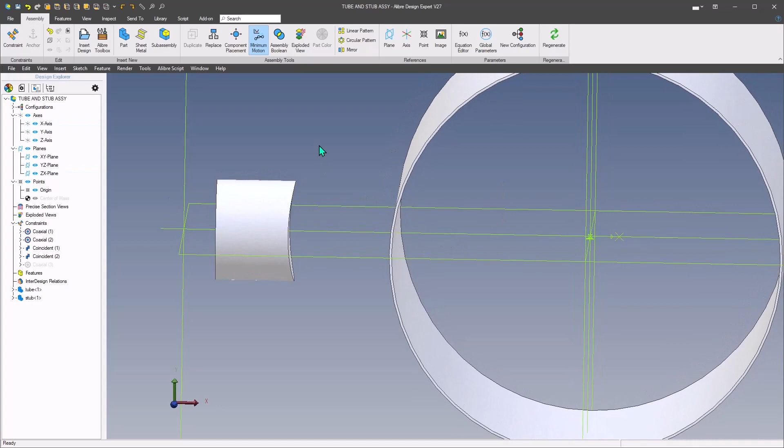The question came up on the forum about how do you create a pattern of holes to attach a small part with curvature to mate to the curvature of a longer part, with a circular pattern of screws to attach these. If you have a hole on plane, that's not a problem since it's straight through, but as you pattern it around the curvature face, figuring out the angle becomes a challenge. So how do you go about doing that?

I'm going to show a technique here using Pro or Expert, and then I'll follow up with how to do it in Atom3D.

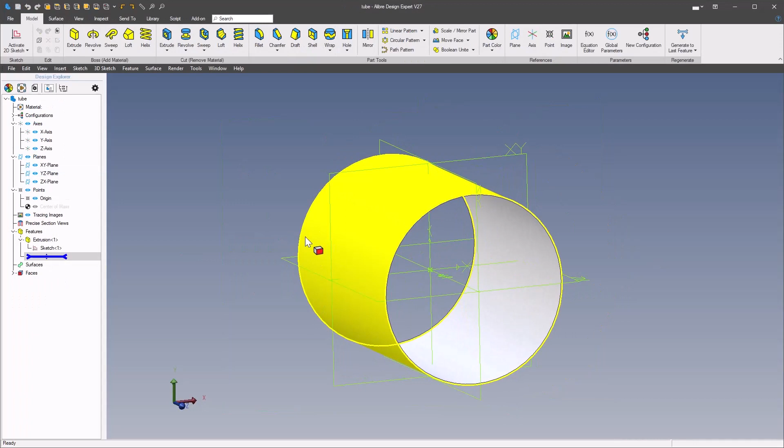First I'm going to open up this tube part, which has a diameter of 10 inches, and open it in a separate window. First thing I'll do is create a plane tangent to that face, then close that and create a sketch.

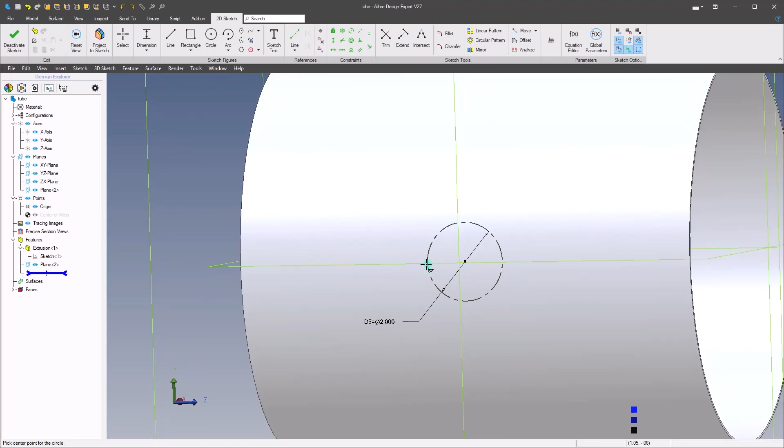We'll have a sketch right on our origin for simplicity, make this 2 inches, and put some smaller circles on here for the hole pattern. The first one will be horizontal to the origin, and we'll make them 1/8 of an inch to keep the numbers easy to remember.

Then we'll add some reference lines in here and dimension these at 120. This one will also be 120, and we'll set it to A1 to equal everything out. Now we have our hole pattern here.

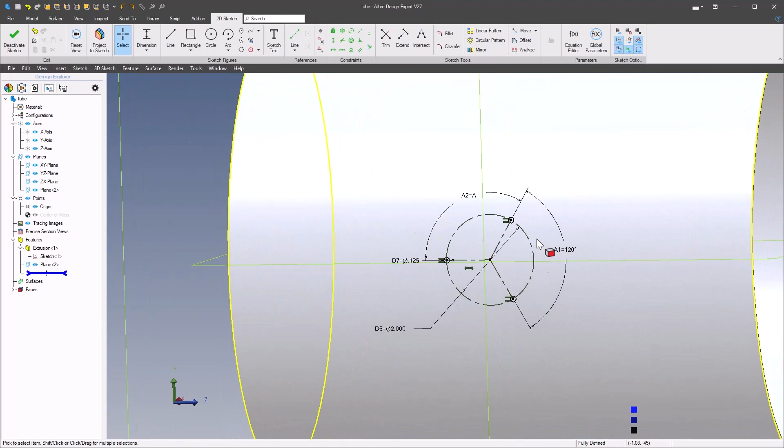Now, if you have Pro or Expert, go to the Model tab and select the Wrap tool. Select this surface, change it to Deboss, and make sure the value is set so it goes through the material. There's your hole pattern.

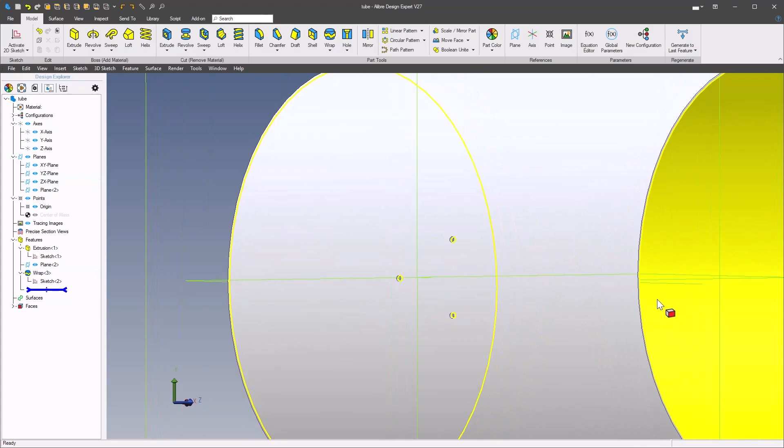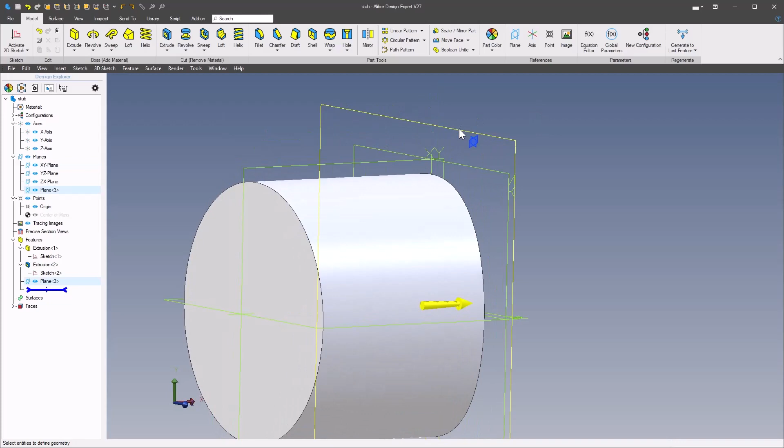Now if we go back to our assembly, we can open the stub in a separate window, and again we'll repeat this. Same steps: we'll insert a plane tangent to that curved surface, and then on this plane we'll start a sketch.

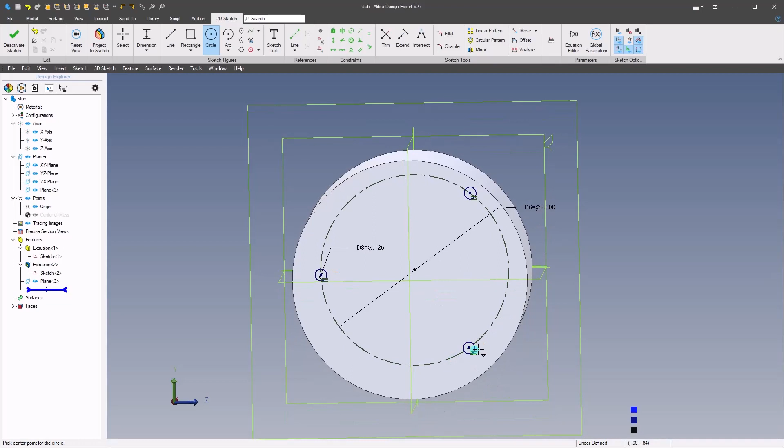Same as before, we'll have 0.125, and make these all equal, and put in some sketch lines here and dimension these. The first one we'll make horizontal, then this will be 120, and this one here will be A1 to make it equal to 120.

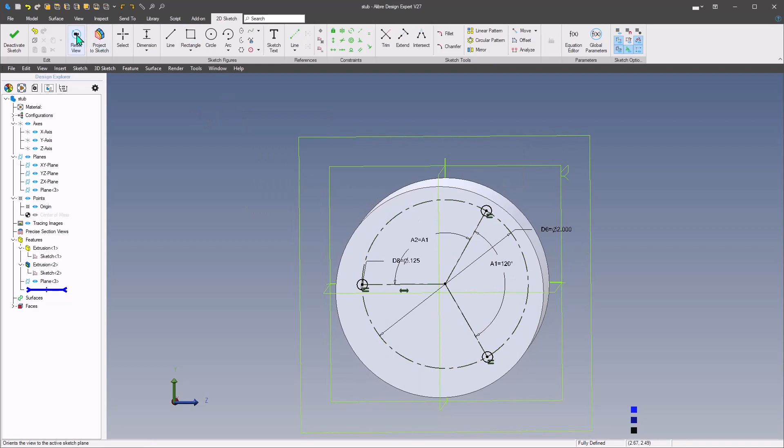Again we'll go up into the Model tab, grab our Wrap tool, select our face, and here we'll just set this to be deep enough for our screw, select OK, and there's our holes.

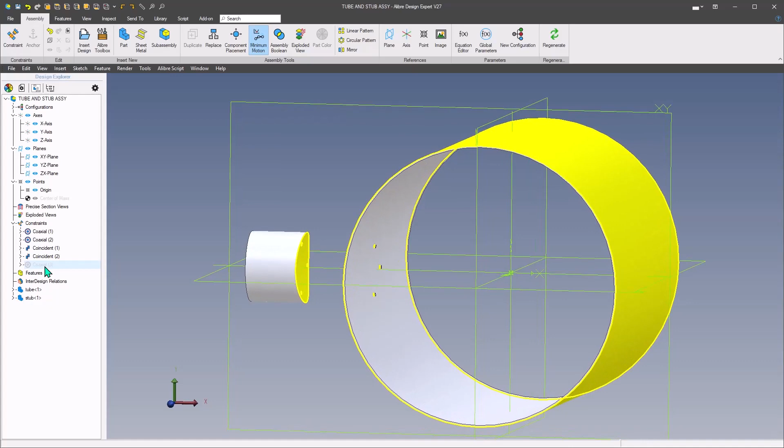Now we go back into the assembly, reconstrain the tube, and unsuppress our mate for that. Let's take a look in our inspection tab, and look at that—we have our holes lined up perfectly for screws to be inserted as our final assembly.

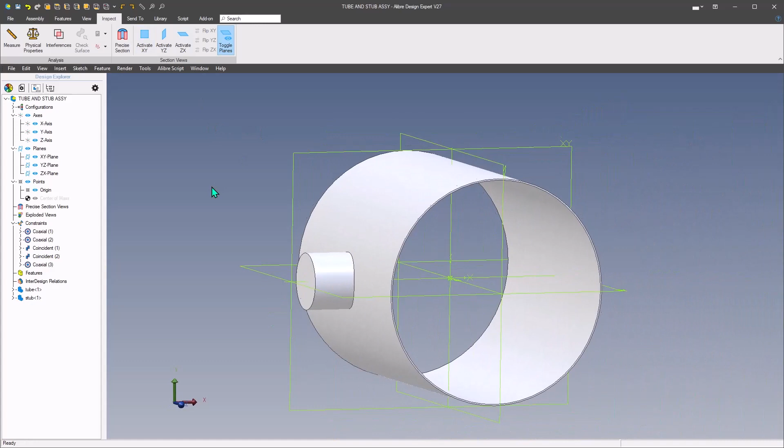So now the question is, how do you do this in Atom without the Wrap tool? Let's go back into our tube assembly, and we'll just delete Wrap.

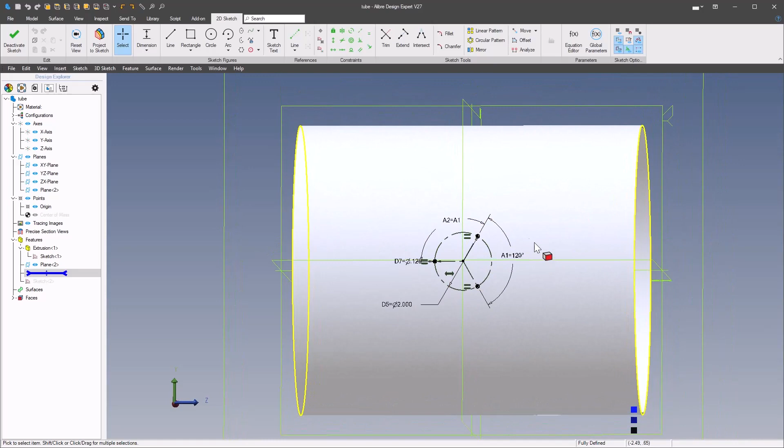We'll come into our sketch, and we need to create some reference geometry on here, because we're going to have to make some extra reference planes to work on. So first we'll insert some points from the sketch. At the center point of each one of these small circles, we'll select that and click Apply, then put a point at each one of those locations.

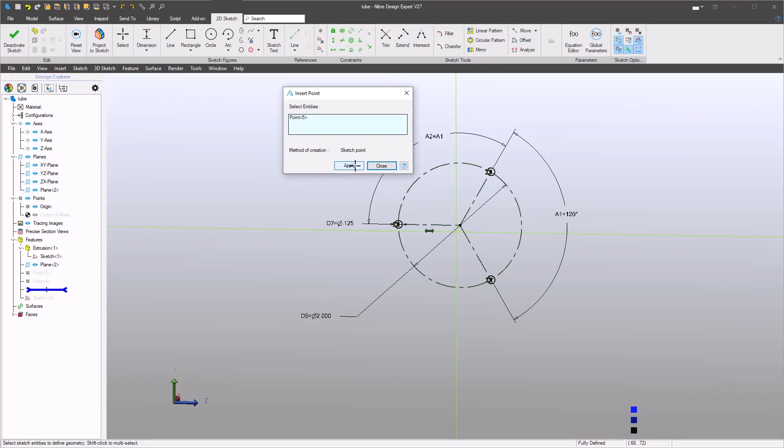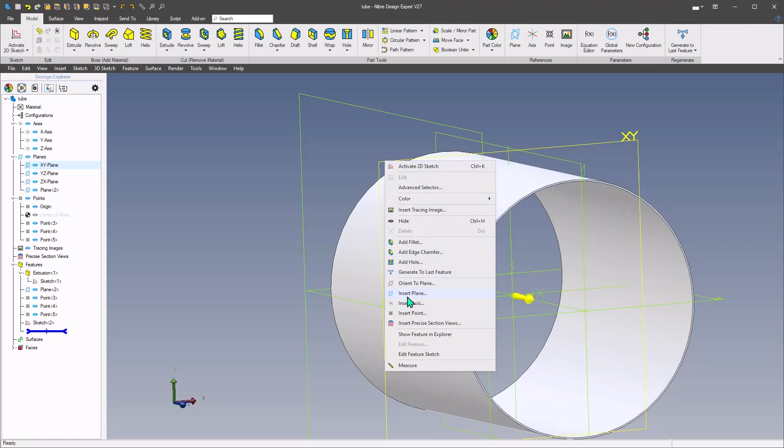So now, looking at the front, these two are off the surface of this part. The first one that's horizontal to the origin is on that surface. So what we need to do is create some planes we can sketch on. We'll go to Insert Plane, grab one of these points here and apply, and then grab this back one here—oops, not that one.

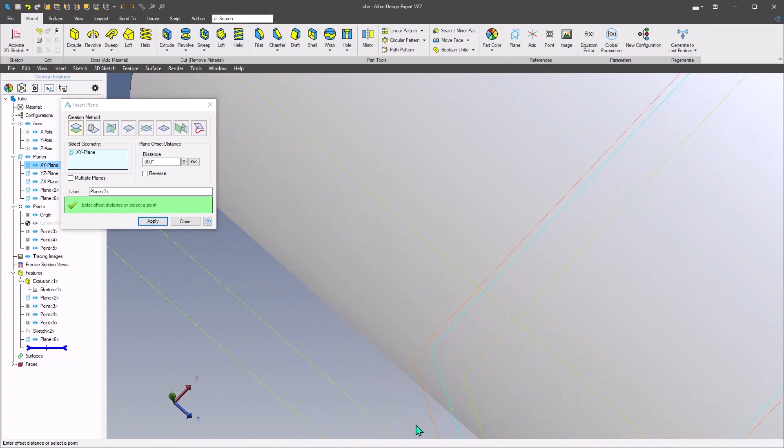Clear all. We want to grab the point. There we go. And we'll close that. Okay, now on this front plane, we'll activate a sketch.

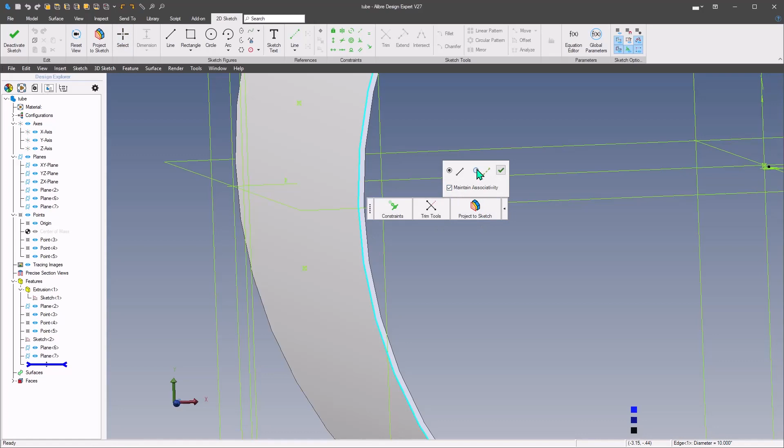And the first thing we're going to do is we're going to grab this first top outside edge, and we're going to project that, maintain associativity, and create a reference figure on there. And then we're going to grab and create an arc. Well, let's see, let's create our arc from the center between these 2 points.

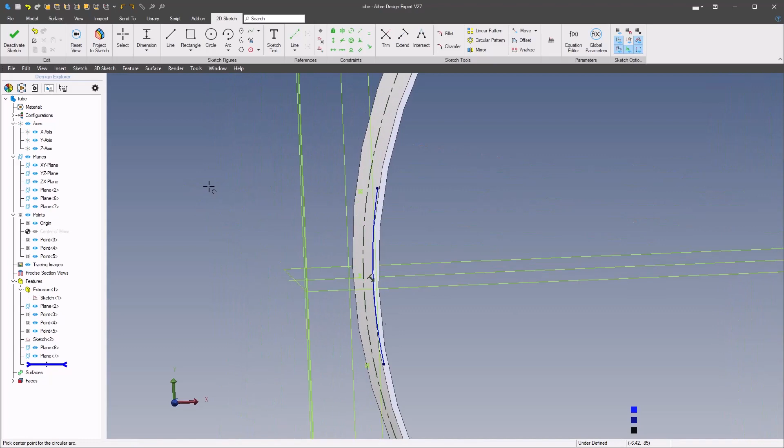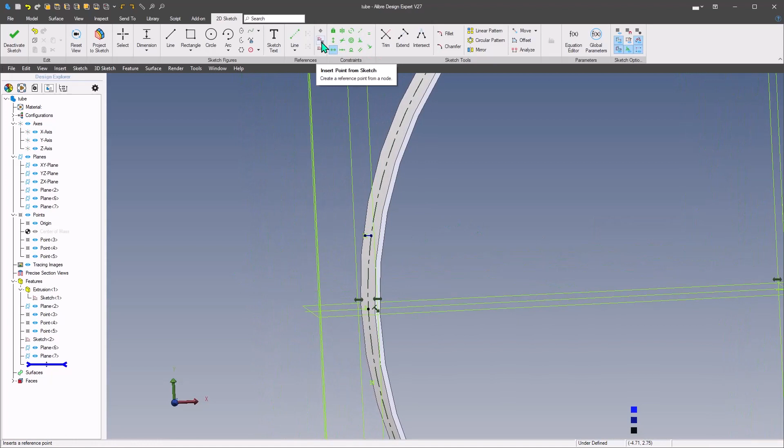Oh, back up. I want to create an arc from this point, because we want to wrap this point over onto this surface. So we're going to have a center of our arc is here, and then we'll constrain that. It already exists, and it already exists. So now let's make sure that this center point is horizontal there, and now we can do a point from sketch to this point and apply that.

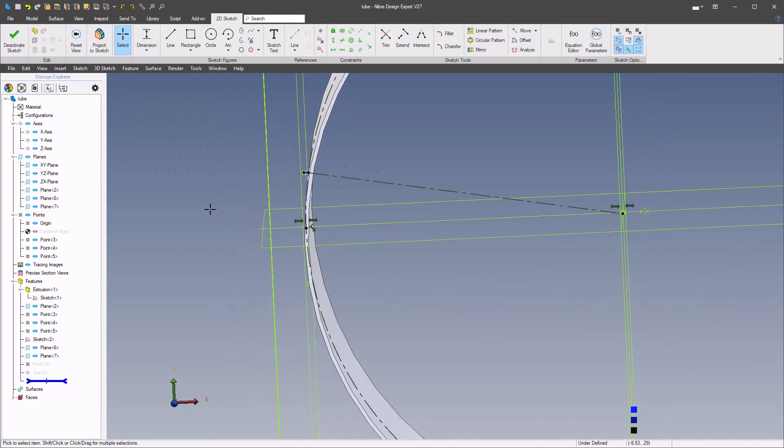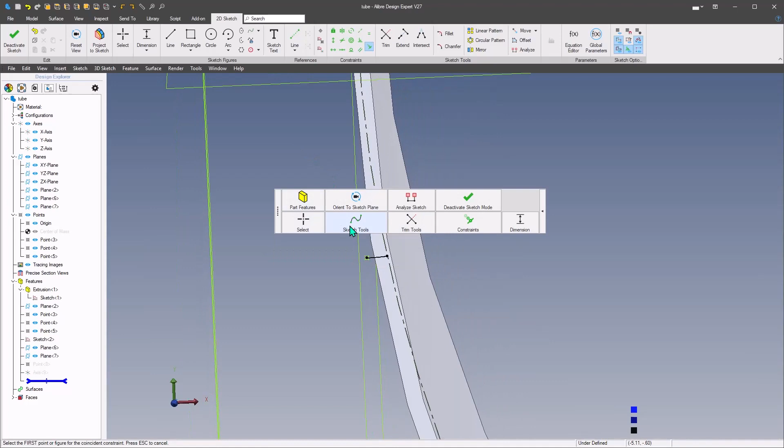And while we're here, we'll throw in a sketch line from that point to the origin, and we'll put an axis on this line. And then again, we'll have the same scenario. We'll draw another arc. This can be the center point. And a couple of constraints there on the endpoints of this arc. One to this point, and then to this line, and reference line from the endpoint there to the origin, and then a reference point on this point, and an axis on this line.

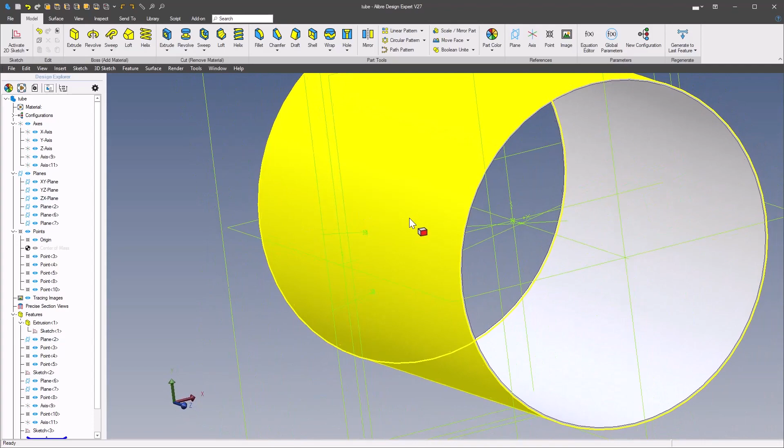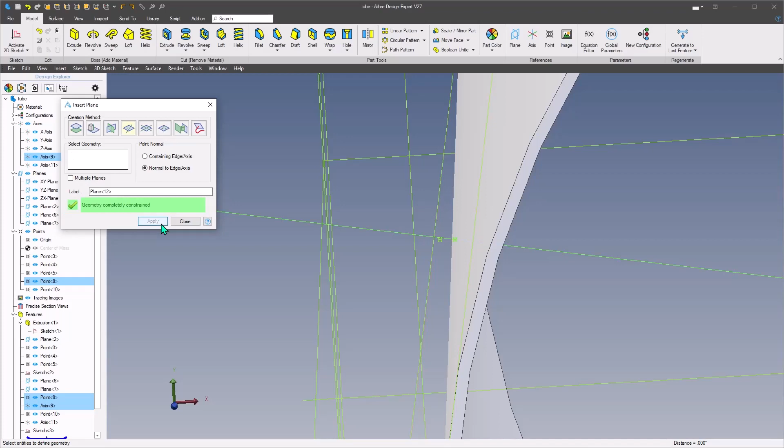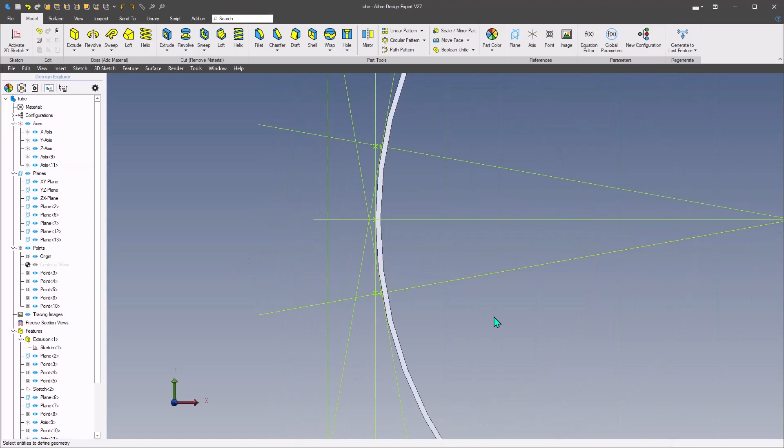Okay, now in order for us to create this circle to punch through these holes, we need a couple more reference planes. So we'll go in here and we'll do an insert plane. We'll grab this first axis, and then we're going to grab the inside point, and we'll select normal to and click apply. And then on this bottom one, we'll select the arc and grab this inside and apply there and close. So now we've got our 2 planes that are on these points tangent to the outside surface.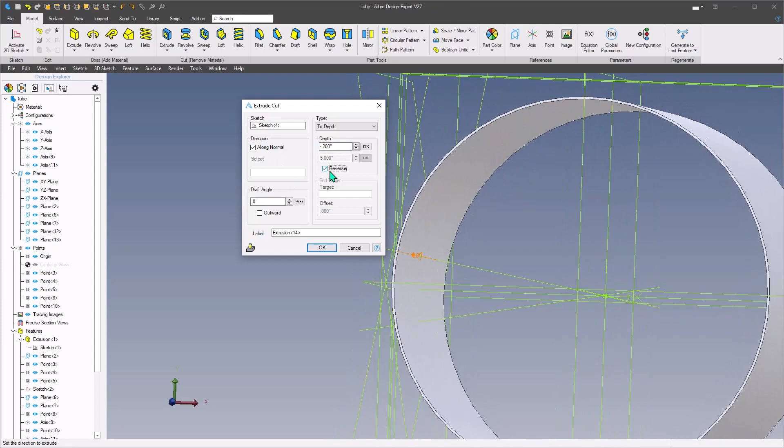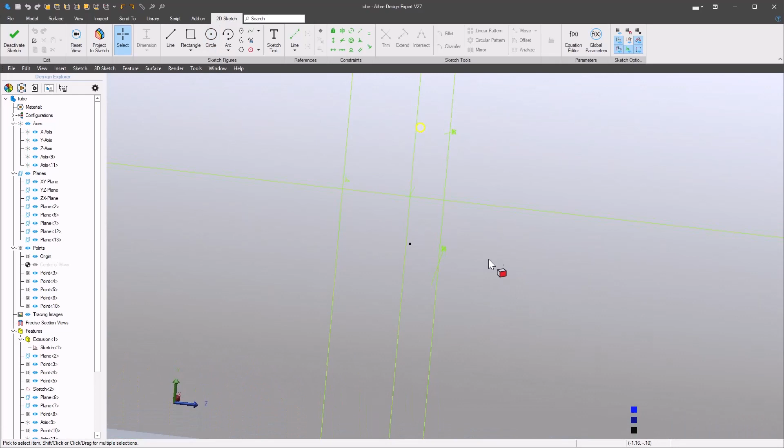So when we create our holes on those points, we'll grab this one here, we'll activate, and we'll draw our first hole. 0.125, and we'll punch that through. Make sure we're going through the material. And then on this plane, we'll do the same thing. We could have mirrored that top hole, but for sake of... oh, I see, I gotta mess that one up already. So let me

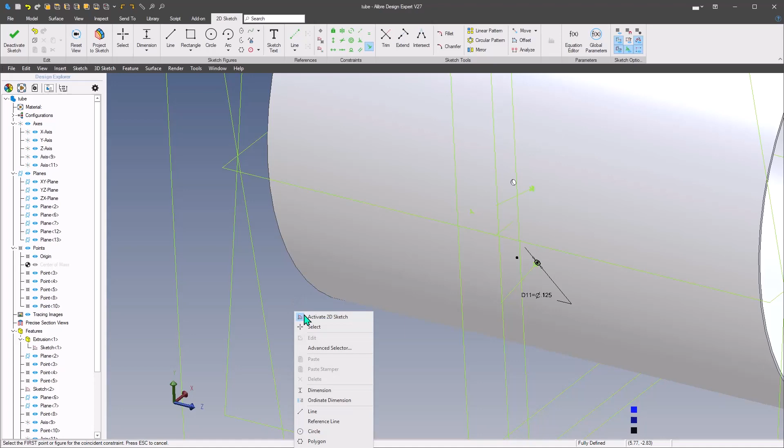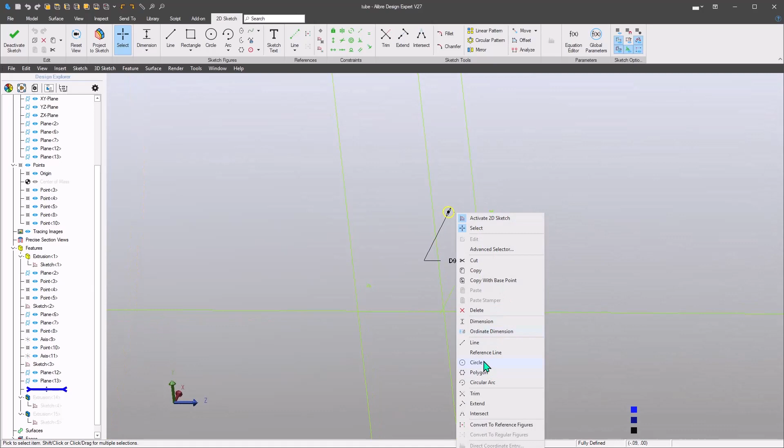0.125, coincident to there. Make sure you select the right, and that'll make sure it's going the right direction. Yep. Okay, let me go back up here. Yeah, see, I did this on the origin. I should have done that on the other, on that other point. 0.125 and coincident from the center to this point. There we go.

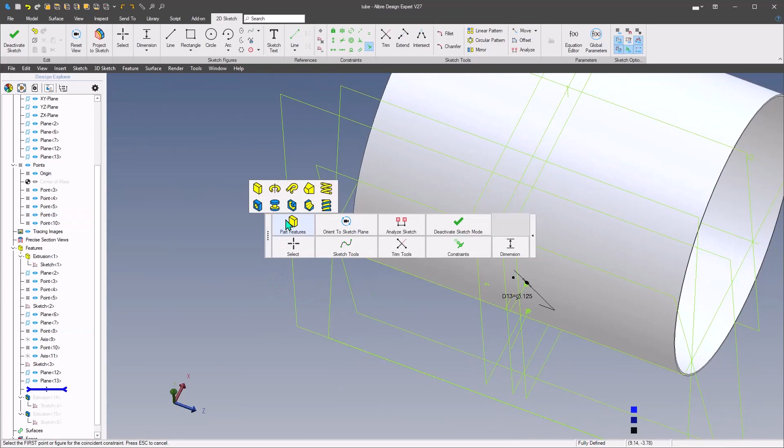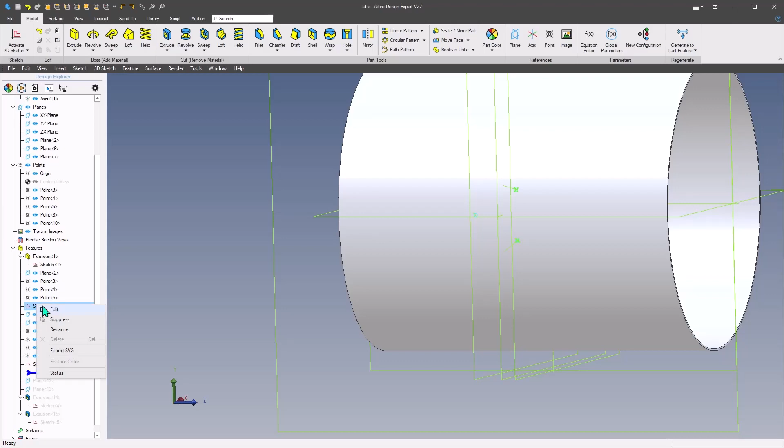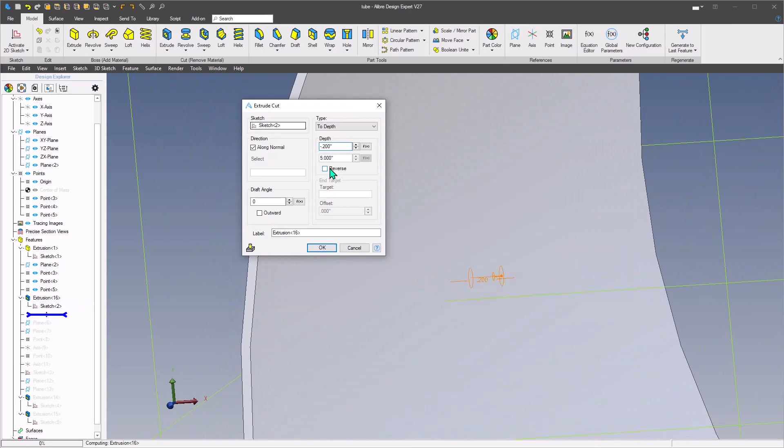Now, those two planes, we can turn them off to get rid of some of the clutter. And if we go back to our original sketch, not that one, it's this one, yep. This hole, this arc, we'll change this to reference, and this one will change to reference, and then we'll punch that through and rebuild. Okay, so now we have these holes with axis points through.

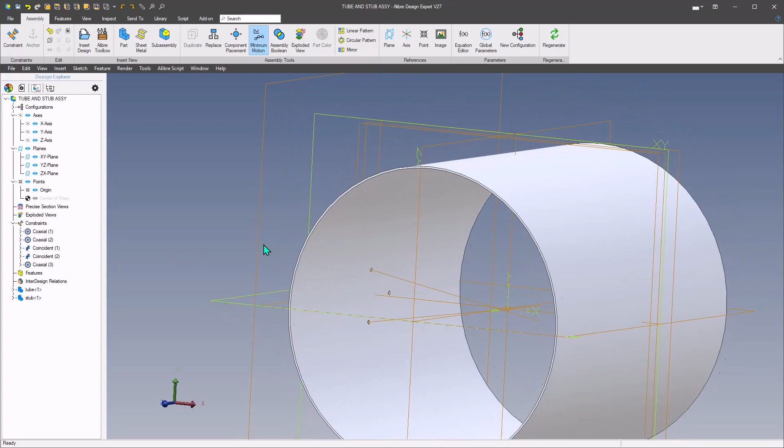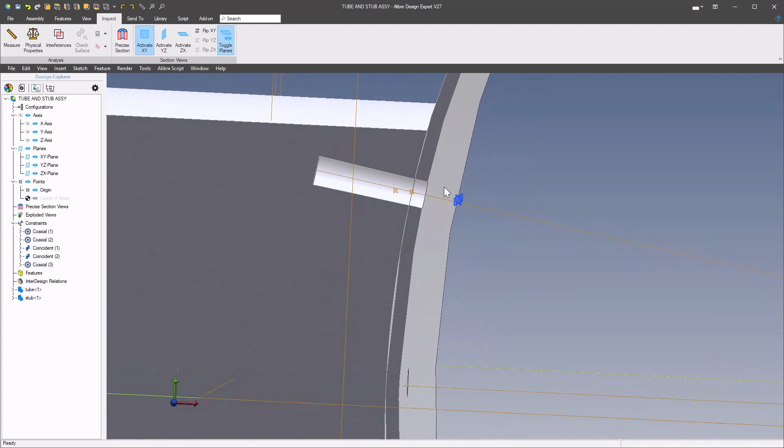So back in our assembly, turn on reference geometry. We have axis holes through, and if we go to inspect, now we have our axis going through the hole, and you can align your fastener to the axis and then coincident to this inside point with an offset so that you're equal to material thickness, and that should line up your part or your fastener for attaching those parts. So anyway, I hope this helps you out in this regard.